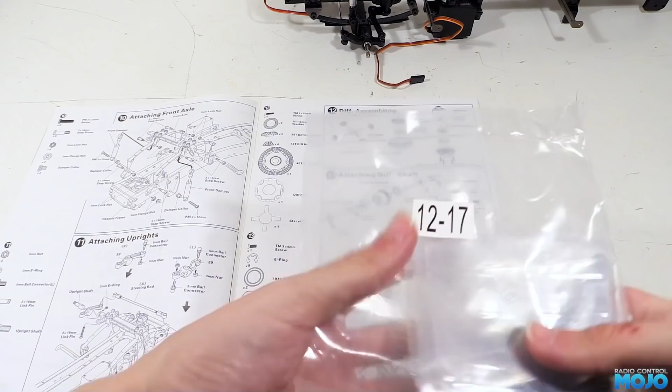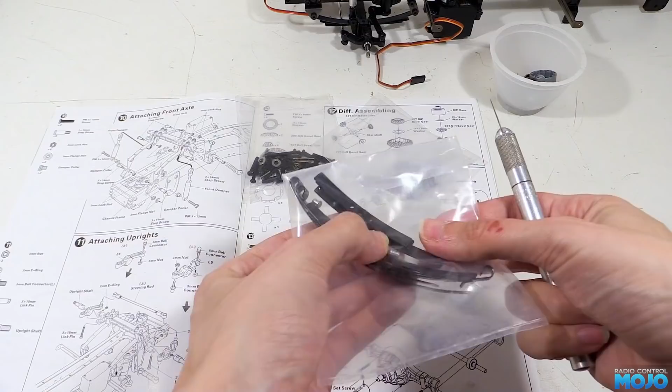This week we're going to put together the rear axle of the Hercules Hobby Actros. It should be interesting as it's a completely different assembly to the Tamiya axle. In the 12 to 17 bag we have the sub bag with all the gears and bearings for the axle. The leaf spring bag, just like the front, they're not riveted together, so we'll just leave them in the bag to one side until we need them.

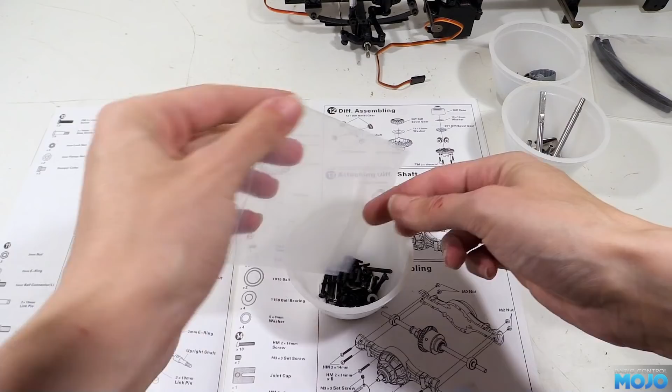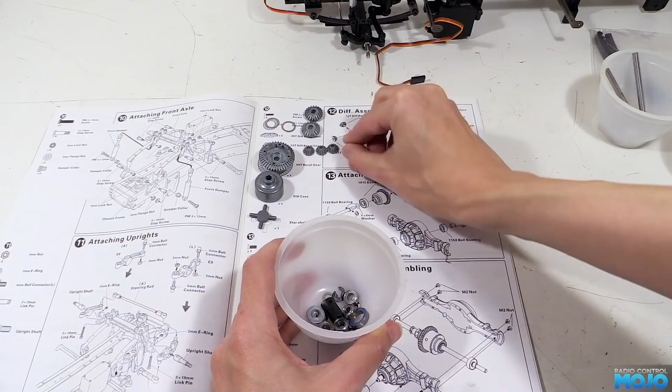This bag has the shackle bits along with the axle shafts. And in the last bag we've got all the fixings. Right then, on to step 12, assembling the differential. We'll need the diff case, the big bevel gear, two 10x12 washers, although I'd be more inclined to call them shims, the star shaft or spider, two of the middle-sized bevel gears, four of the small bevel gears, and four M2x10 screws. We'll also need some grease to build up the diff.

Some people like to glue the differentials on the single axle truck solid, and it's tempting, but I think I'd rather have a working diff. So for now we're going to use some more of the grease that came with the 3Racing EX-Real. It's fairly sticky, so it'll help a bit when one of the rear wheels gets a bit light. We might end up changing it for something even thicker at some point in the future though.

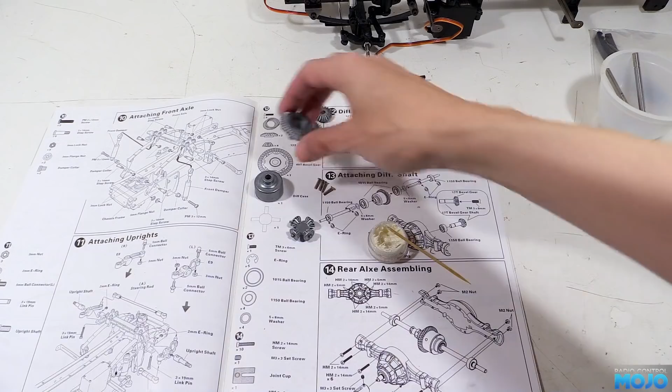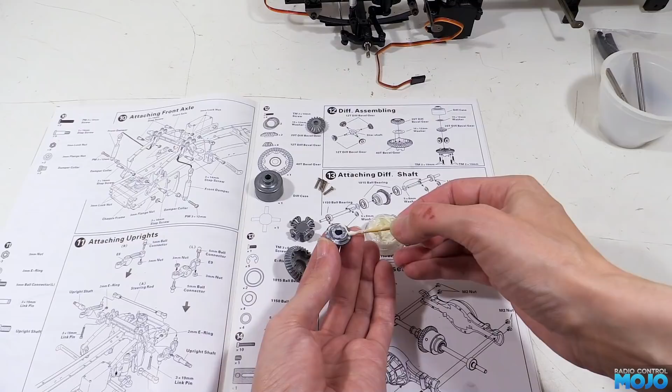First we'll assemble the spider with the small bevel gears. We need to smear a little bit of grease on one of the stubs, then spin a gear on. Repeat 3 more times and it's ready to fit. Next are the medium bevel gears, one goes in the diff case and one fits inside the large bevel gear. We'll need to grease up the flat face on one of the bevel gears, then drop on one of the thin washers and follow that with some more grease. With it all nicely coated we can drop it into the large bevel gear.

We can build up another washer grease sandwich on the other bevel gear and drop it down into the bottom of the diff case. To try and gum it up as much as possible, we're going to really try and fill it up with grease. We'll start by running some around the bevel gear in the diff case, giving it a nice thick coat. Next we drop the spider in with its bevel gears and give it a nice thick coat of grease too, putting some nice blobs between the gears.

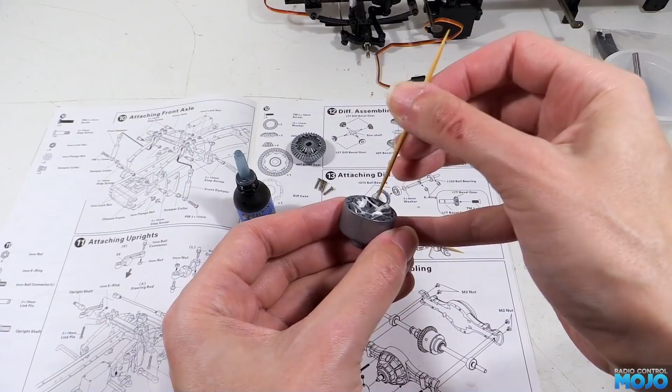Before we fit the large bevel gear, we do need to apply a little bit of thread lock in the threaded holes in the case. We really don't need much, just a little bit on a cocktail stick and smear it around. Now the large bevel gear goes on and we can fit the 4 screws. Just like the Tamiya diffs, the small screws are rather delicate, so you need to make sure your screwdriver fits properly. It would be all too easy to slip and ruin the head.

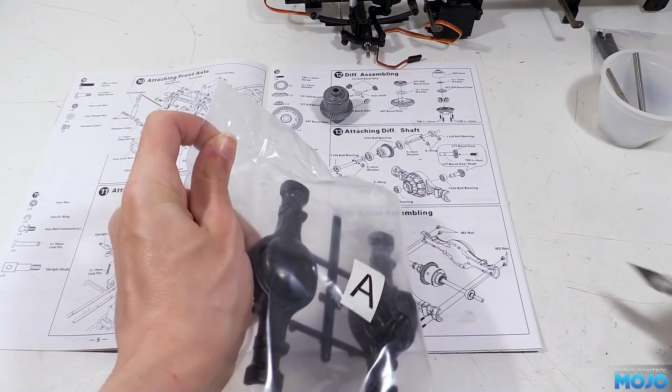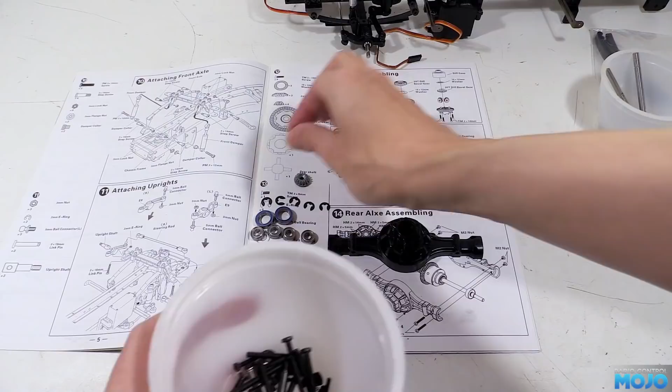Okay, step 13 next, we're going to fit all the bits to one half of the axle. We'll need the axle case half that has the input shaft hole, and as you can see it looks a lot more realistic than the Tamiya one. For the metal bits we need the 2 big bearings and 4 small ones, the 17 tooth bevel gear, 4 5x8 washers, 5 large E-clips, a single 3x6 countersunk screw, and the 2 long axle shafts and the short input shaft.

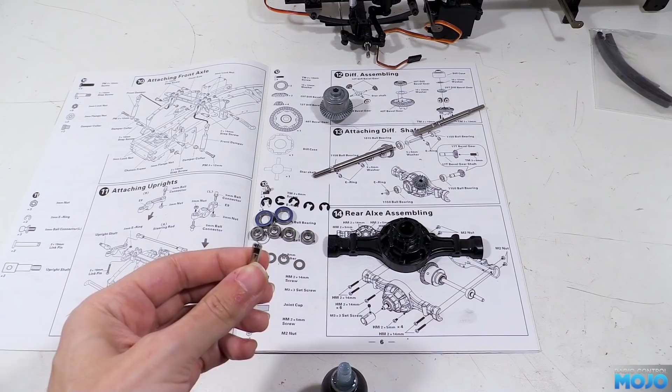Right, the first thing to do is a bit of a quickie. We need to attach the bevel gear to the end of the input shaft. To make sure it's not going to fall apart, a little bit of thread lock in the thread at the end of the shaft is a rather good idea. Then we just slide the gear on and screw in the countersunk screw. Doing it up about as tight as you can by hand is more than good enough.

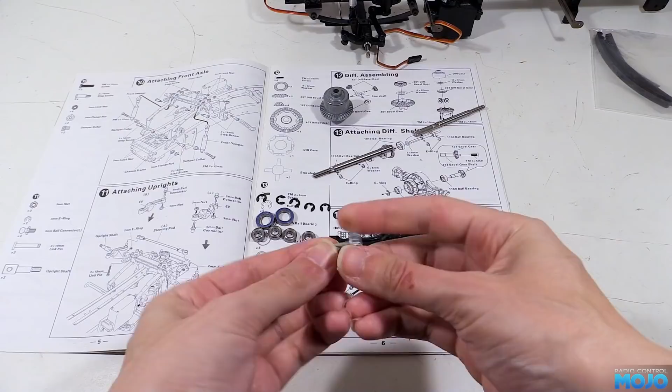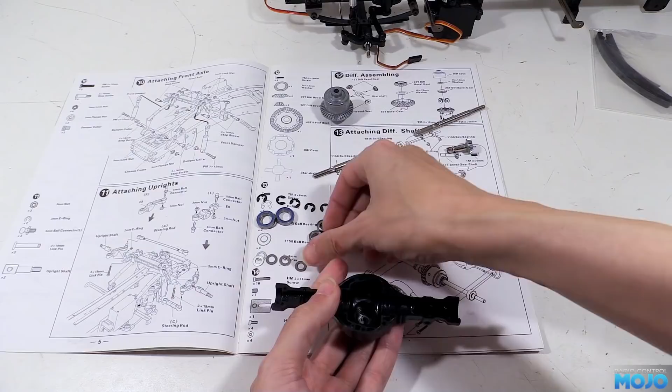If you get one with a slightly dodgy thread, you can stick the shaft in a soft-jawed vise to get a better grip. Just be really careful not to over-tighten the screw. Next we can pop 2 of the small bearings into the axle case. One goes in from the inside and one from the outside. You can use a small screwdriver to gently press the bearings in place if they're a bit unwilling.

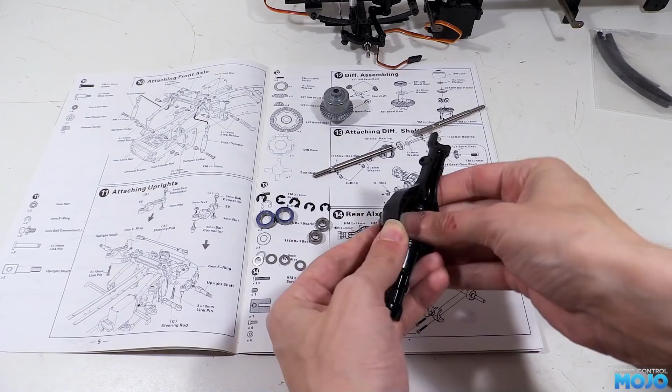Because this model's mostly going to be used indoors where it's fairly clean and dry, I'm not going to add any grease. Usually for the off-road models I'd pack the space between the bearings just to help against water, but there's really not much point on this one. When the bearings are in, we can just pop the shaft in with the bevel gear on the inside. Then to hold it in, all we do is use one of the big E-clips.

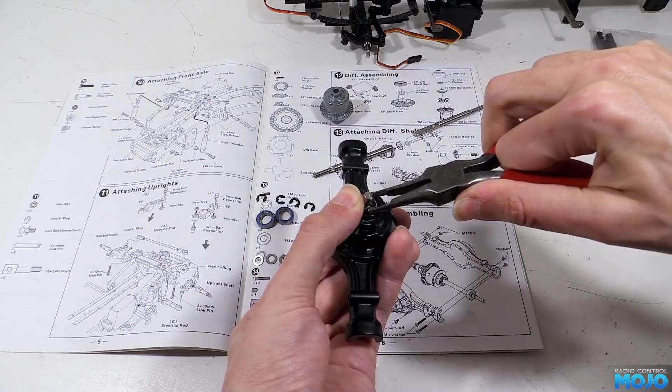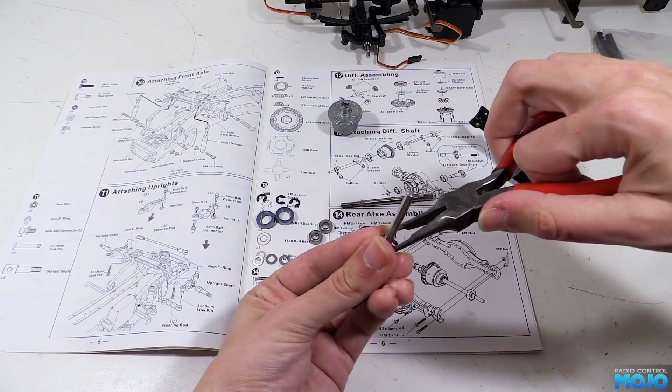Next we've got the axle shafts. Now they both need a bearing, 2 E-clips and a washer fitting. But it's not all that clear where the washers are supposed to go. The list says we need 4 washers, but the diagram only seems to use 2, so we'll have to make it up as we go along and see how it all fits together. The diagram has us fit the 2 E-clips to each shaft with a bearing in between. The bearings will end up sliding all the way to the outside when it's fitted to the axle case.

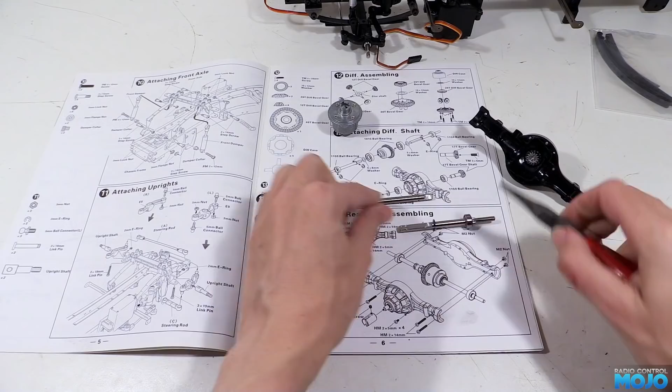On either side of the differential we need to slide on one of the large bearings. They should fit without a fight as long as you press them on nice and straight. Next we can pop a washer on the inside end of the shafts and press them into the diff case. Now I did grease up the end of the shaft a bit so it slides in a bit easier, and I also applied a bit on the end of the diff around the bearing. The other shaft should also slide in just as easy, not forgetting its washer. We're still left with the other two washers though, that don't appear to have a home.

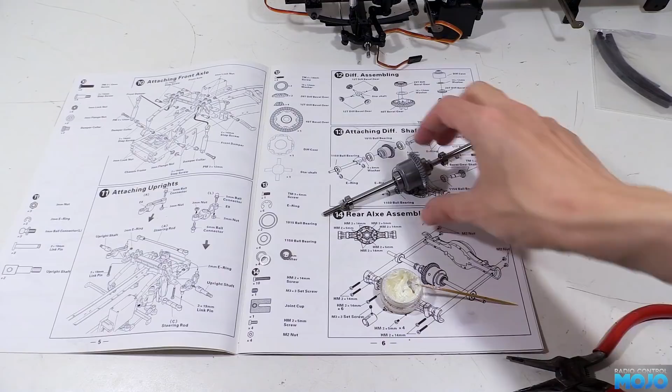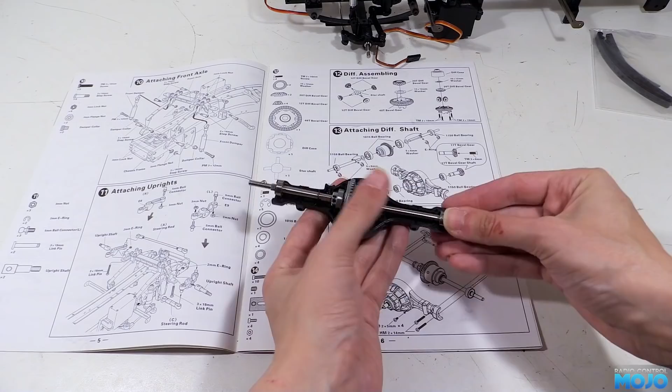The differential assembly can now drop into the axle case. The two small bearings slide all the way to the outside and drop into slots right at the ends of the axle. At first glance, it all looks like it fits rather nicely. However, on closer inspection we can see the washer isn't actually doing anything. And worse still, the E-clip is actually only bearing on a plastic web in the case. That's not going to last more than 5 minutes.

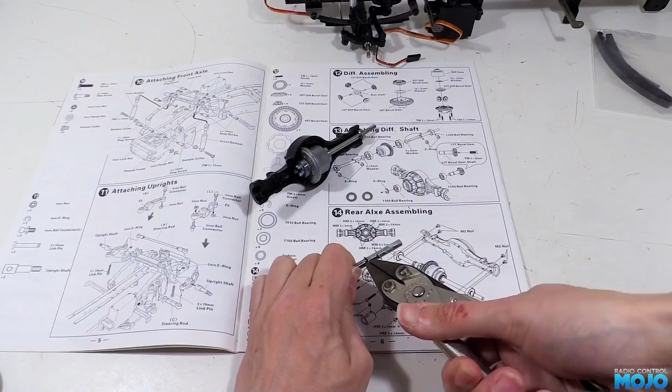We can pull the shaft out again and pull the inside E-clip off and move the washer to the inside. Now at least the E-clip is bearing on a steel washer rather than plastic, so that's going to work. It's a similar story at the other end too. Putting a washer between the E-clips allows it to do something useful.

And skipping ahead a bit, when the axle went together I did find it was rather stiff. There wasn't quite enough clearance for it to turn freely. I ended up replacing the washer with a 0.3mm steel shim. After that, the axle ran very nicely. Now it's worth keeping in mind, they very nearly got the design right, you just have to be a bit careful when putting it all together.

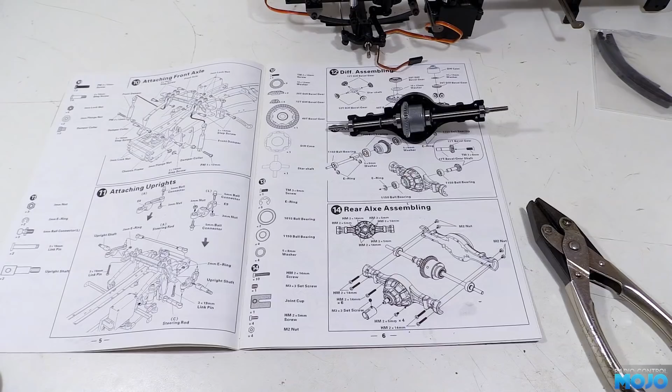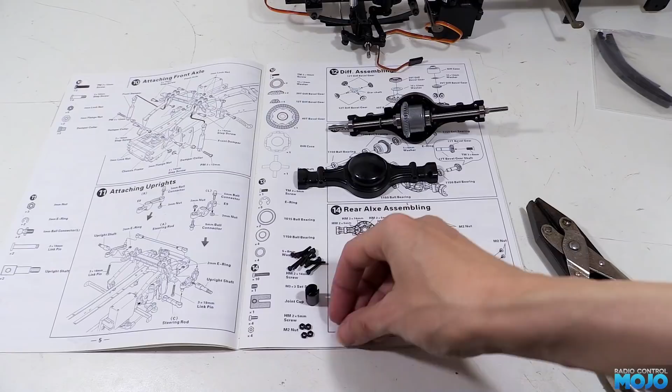Step 14 now, closing up the axle. We will of course need the other half of the axle case, the drive cup, 10 M2x14s, an M3x3 grub screw, 4 M2 nuts, and 4 M2x5s. Now as you might imagine, it's all quite straightforward. First we can offer up the case and do a test fit. All we want to do is make sure it all lines up nicely and there's nothing obviously binding.

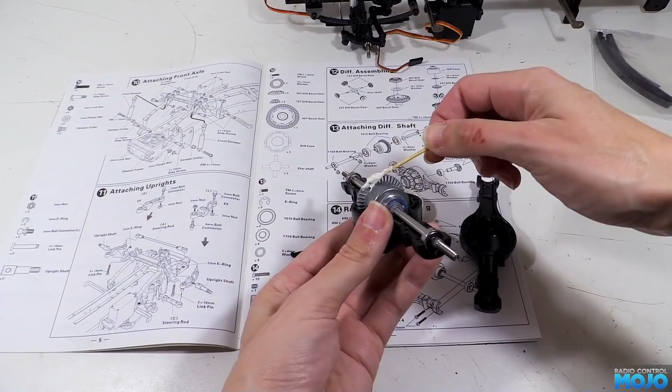If it's okay, we can go ahead and lather up the bevel gear with a nice bit of grease. A bit too much is better than not enough. Any excess is going to get squeezed out and flung off after a few minutes of running.

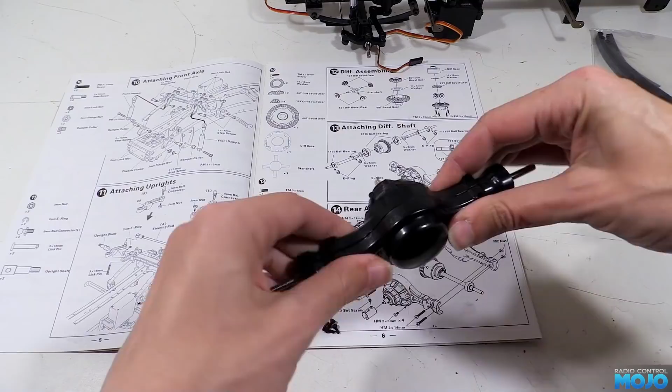Now we can put the halves together again and start fitting all the screws. There's a nice diagram showing the length of the screws around the pumpkin. The M2x5s are there just for show, making the amount of screw heads even around the edge. The M2x14s go all the way through and thread into the other half.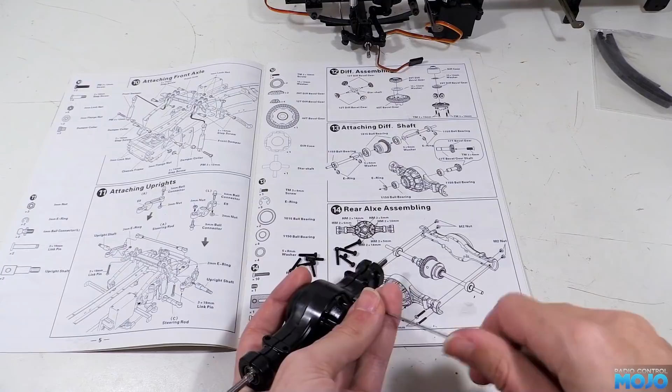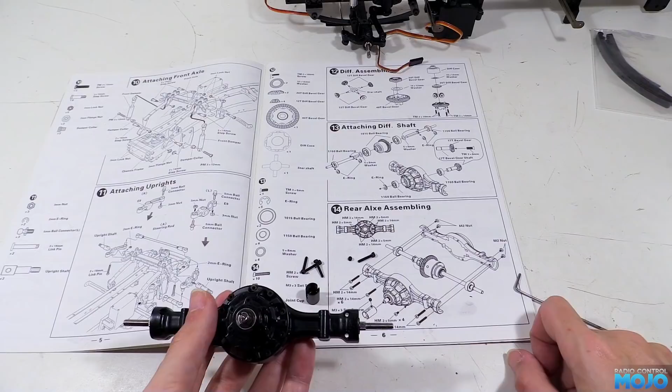It ends up looking rather nice indeed. Just watch out for over tightening the screws. The M2 threads going into plastic won't take much to strip. At the ends of the axle we have 4 hex-shaped holes for the nuts, and we use 4 more of the M2x14s to hold it all together. A tiny bit of thread lock probably wouldn't hurt while we're there too, just make sure you don't get any on the plastic.

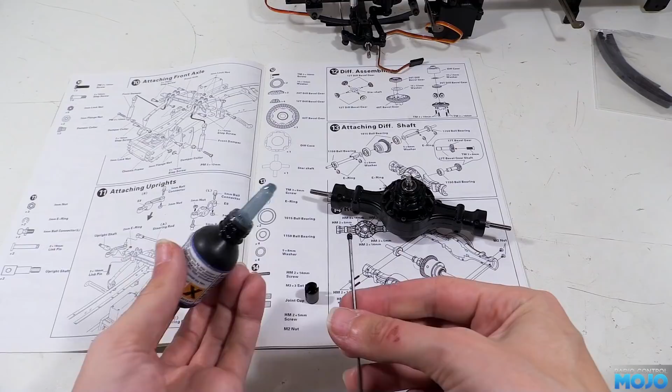That just leaves the drive cup, where we need to add a dab of thread lock to the grub screw and thread it in a few turns into the cup. Line it up on the flat on the input shaft and sit it all the way down so it's in contact with the E-clip, then nip up the grub screw. And there we have a rather nice little axle.

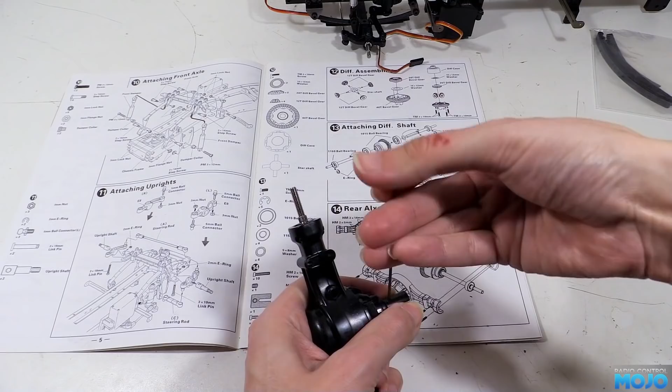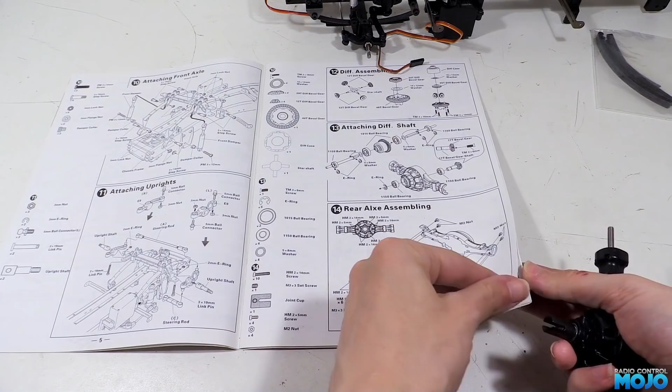It definitely looks nicer than Tamiya's, but the fit of the parts is lacking. The Tamiya just falls together and you can't help but have a smooth running axle. The Hercules does need a bit of thought and fettling to make it run well.

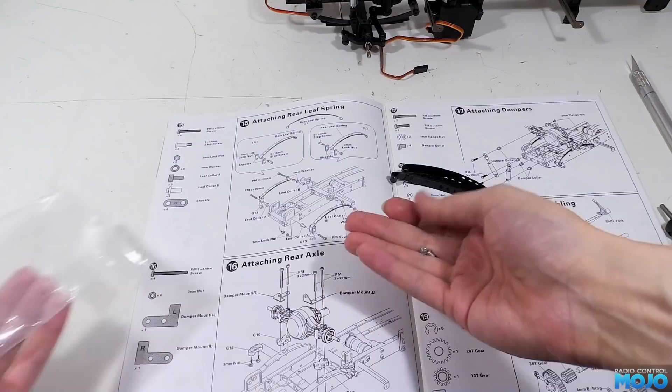Step 15, fitting the leaf springs to the chassis. Just like the front set, the rivets aren't riveting anything, they're just loose in the bag. But thankfully, because of the way the axle mounts to the rear, it's a lot easier to assemble.

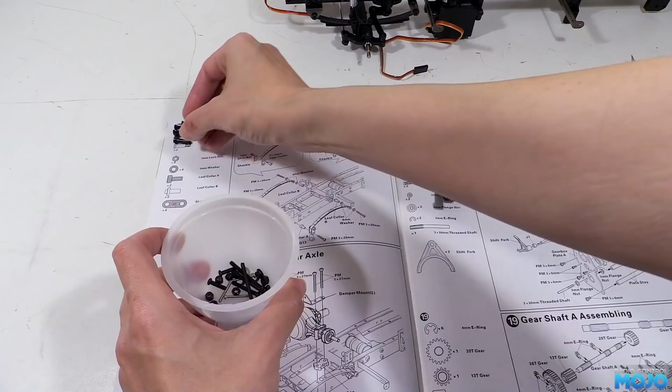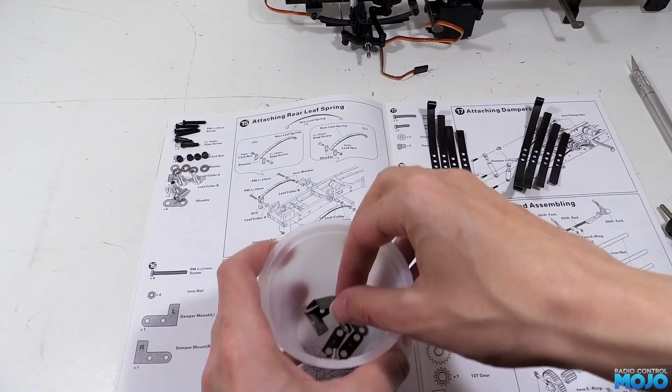Right, we're going to need the 2 main leaves and all the sub-leaves, 4 M3x20s, 2 M3x14 step screws, 4 M3 nylocks, 4 washers, 2 leaf collar Bs, 2 leaf collar As. Now they both look similar, but the diagrams are nice and clear. And we'll need 4 shackle plates. We'll also need a pair of plastic spacers, Q13s.

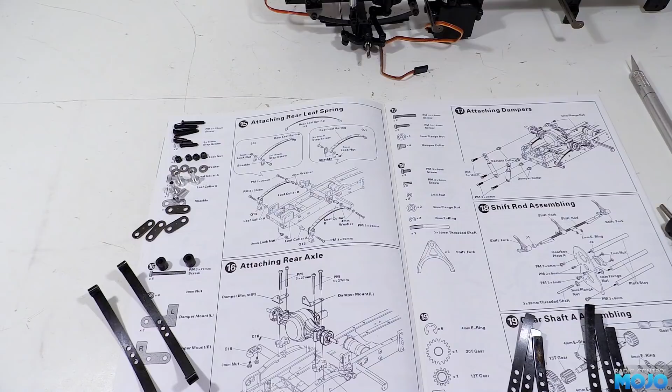The manual wants us to assemble the shackles on the leaf springs first, then attach it to the chassis. I think it's going to be easier though to mount it to the chassis first, so that's where we're going to start. We need one of the collar A's, the one with the flat end, and we pop a shackle plate over the end, followed by a Q13 and another plate.

We then insert one of the long screws through the middle and offer it up to the hole at the top of the chassis extension, while at the same time holding one of the nylock nuts on the back. There's a hex-shaped hole for it, so we don't have to worry about getting a spanner in. We just need to hold it in so we don't push it out with the screw. When it's all done up, the shackle plate should spin completely freely on the collar. If they don't, find out why before moving on.

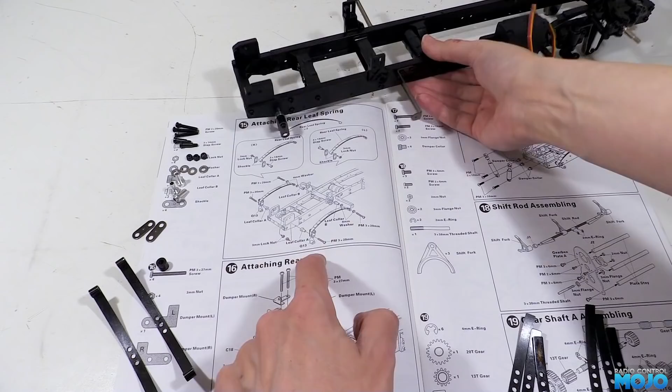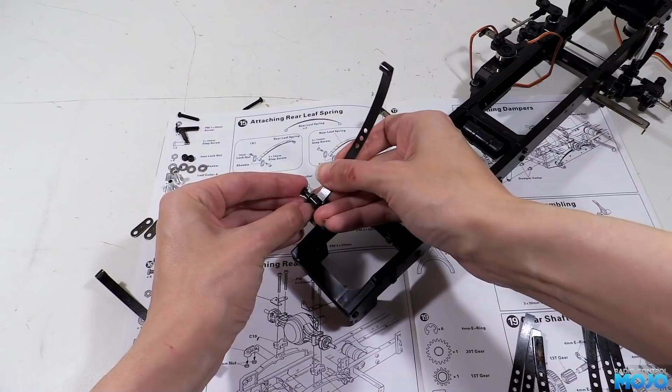Next we can install the leaf spring. Now I'm installing it on the top of the chassis so we have access to the shackle. This time we just use one of the step screws and a nylock nut. The instructions want us to use a step screw from the inside and put the nut on the outside, but I found it fits okay the other way around, and I think having the screw head on the outside just looks that bit nicer. When the screw's nipped up, it should, just like the other end of the shackle, move completely freely.

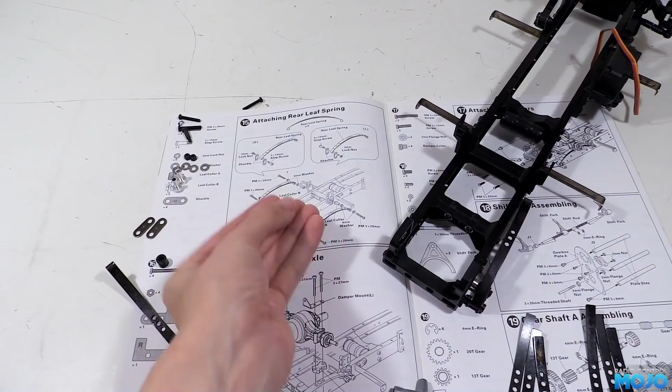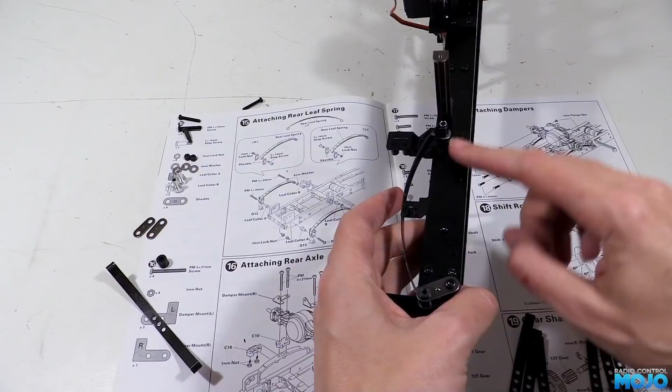The fixed end of the leaf spring uses a collar B and a couple of washers. We fit the first washer over the collar and insert it from the inside of the hole at the end of the leaf. Then we press the collar into the plastic mount we fitted to the chassis earlier. Fit another washer and insert one of the long screws. The screw threads into an M3 nylock we fitted to the cross member back in the first build video. All we need to do is nip up the screw and the spring is installed.

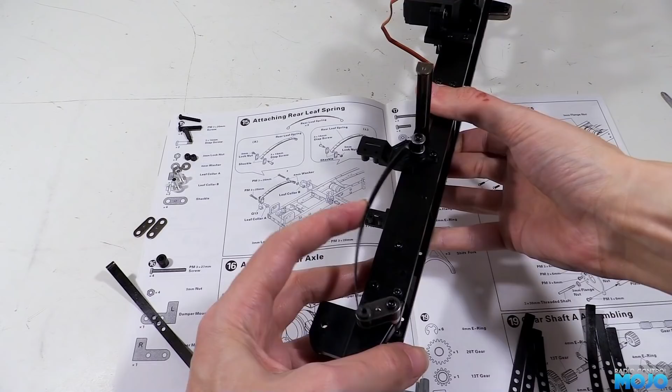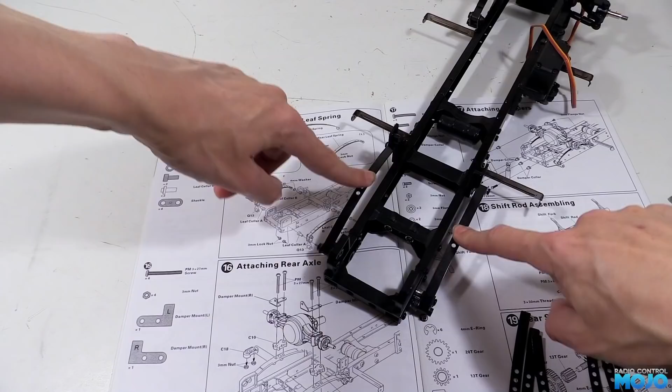If all has gone well, it should flex smoothly without catching. If it binds on anything, fix it now rather than waiting. And of course there's another one to install, but it's exactly the same process, so we'll just cut it in. Very nice. Step 16, hanging the axle.

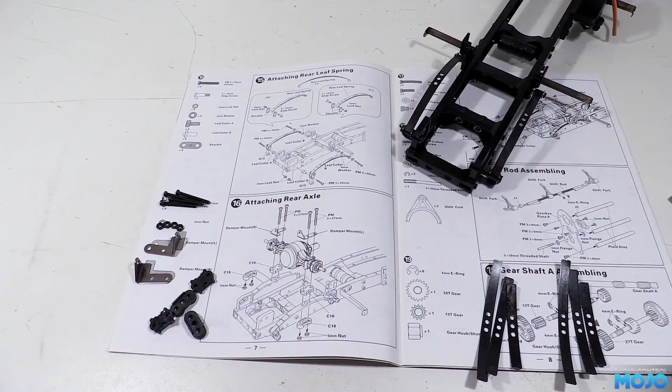This time we need 4 M3x27s, 4 M3 plain nuts, and the left and right damper mounts. There's also 2 C10s and 2 C18s that make up the axle mount. Starting on the top of the leaf spring, which is the underside here as the chassis is upside down, we need to hold a C18 under the leaf. Then carefully stack up the shorter leaves to make a pack and pop a C10 on the top.

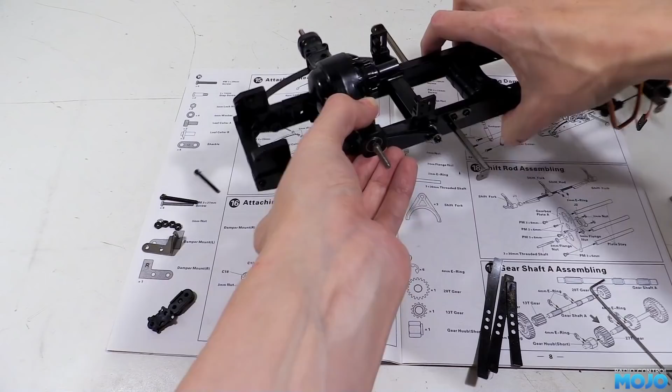Now while holding all that lot together, because I forgot to get the axle ready, we need to fit the appropriate sided damper mount to the axle and push in the long screws to keep it all in position. Now we can offer up the axle to the spring and pass the long screws right through the mounts and leaf pack. Now it might need a bit of a jiggle to get all the screws through all the holes in the leaves, but as long as they're somewhere near lined up, they should go through easily enough.

While still holding it all together, we can thread 2 of the nuts on the end of the screws. There are hex-shaped holes in the C18 mounts, so once a nut finds its way in, it's just a case of nipping up the screws. The other side is of course exactly the same, so rather than repeat myself, we'll just cut to it being complete. The only other thing we might want to add is a little bit of thread lock to the screws, just to make sure they can't vibrate loose.

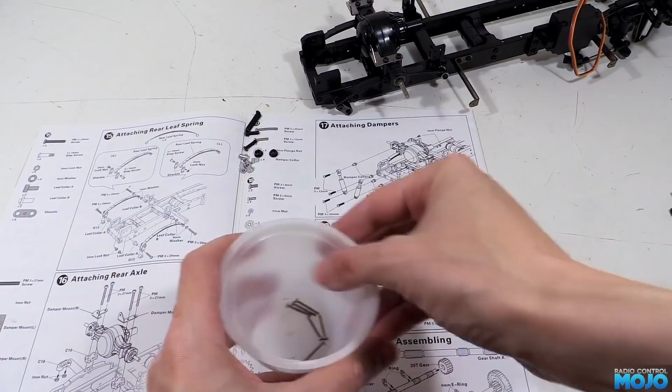And there we go, one well hung axle. It feels nice and smooth in terms of the springing. I'm quite impressed. Step 17, the dampers. We'll need the 4 damper collars, 2 M3x12s, 2 M3x20s, 2 M3 flange nuts, and 2 non-damping dampers. There really shouldn't be much to this one.

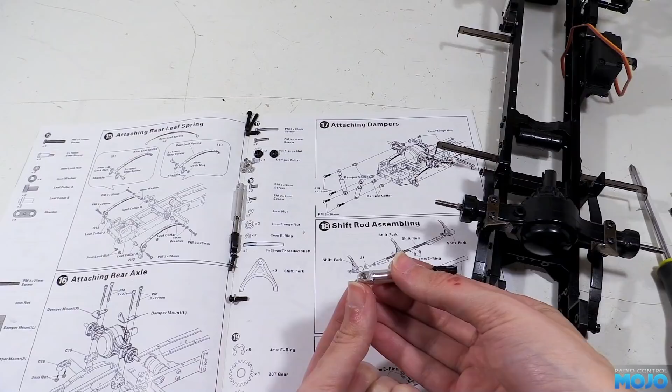First, the top of the damper needs to be screwed to the cross member we fitted the press nuts to in the first video. We've still got the screws fitted that pull the press nuts into position, so they'll need to come out first. Now all we do is pop a collar on the top of the damper and fit an M3x20. But wait, there's a problem.

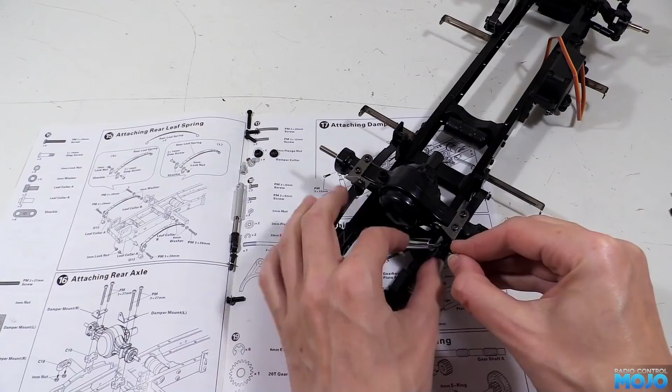I'm not sure if I didn't get an earlier step quite right, but if the damper collar is all the way up against the cross member, the damper's not going to be in line with the lower mount. You can almost force it, but that's not going to be a long-term solution. After a bit of fiddling about, I found if you install a half nut between the collar and the cross member, it all lines up perfectly.

And now that it does all line up, we can pop a collar into the bottom of the damper and use an M3x12 and a flange nut to fit it to the lower mount of the axle. Oh, and if you want straight access to the screw heads at the top of the dampers, there's a somewhat convenient hole in the rear member. I would have used them, but from the angle I'm working at, I didn't even see them.

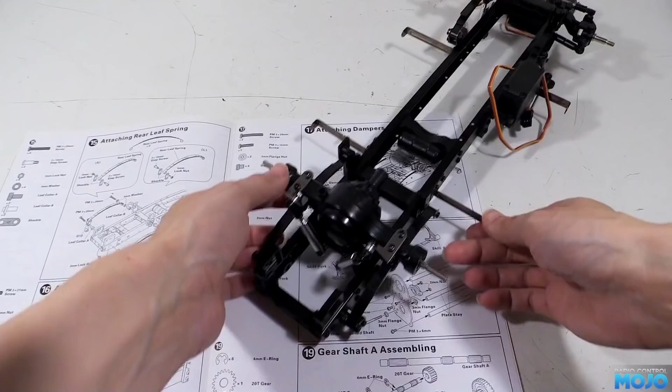Someone needs to invent an invisible camera. Actually, that's probably a bad idea.

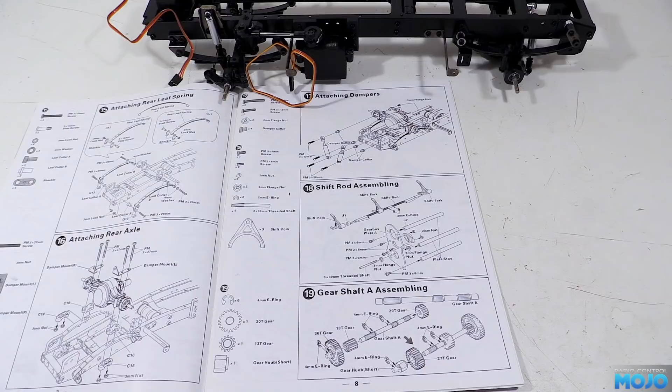Couldn't be much simpler then, and with both installed, the suspension looks like it's going to work a treat. It almost went together as well as the Tamiya kits. As long as you've got some extra patience and some nuts, bolts and shims at hand, there's nothing that's too difficult to work around. And that brings us to the end of this week's exciting instalment.